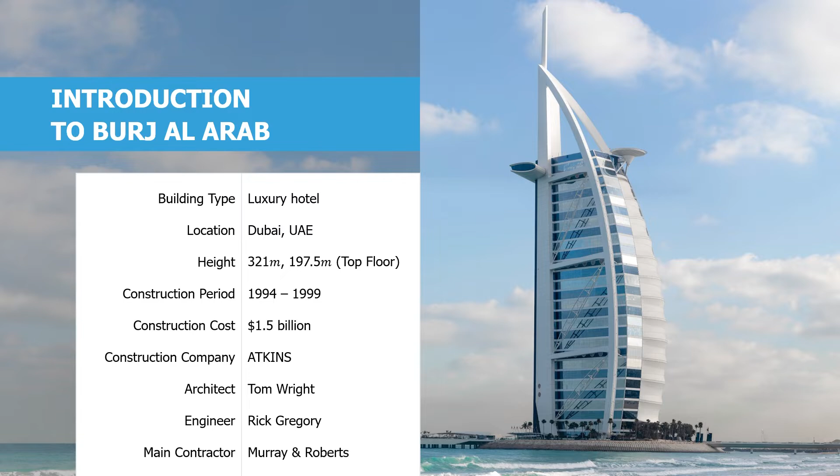Anthony Costa said Burj Al Arab takes hotel design to a new level of modern luxury and has also redefined the meaning of exceptional hospitality both in Dubai and around the world.

The project was split into 5 distinct parts with milestones assigned to each of the phases. However, the project monitoring and closure part, which includes interior legal elements and hotel sales, is not relevant to this class and therefore we don't explain it.

Dubai has achieved rapid economic development due to oil, but it was too risky to entrust Dubai's future to oil, a limited resource. So Dubai's ruler Mohammed bin Rashid Al Maktoum was looking for a new way to earn money. The alternative was a luxurious vacation spot, so the ruler needed a huge and luxurious symbol, like the best hotel in the world. It was planned to create a luxurious vacation spot to promote Dubai and make money from high-income earners.

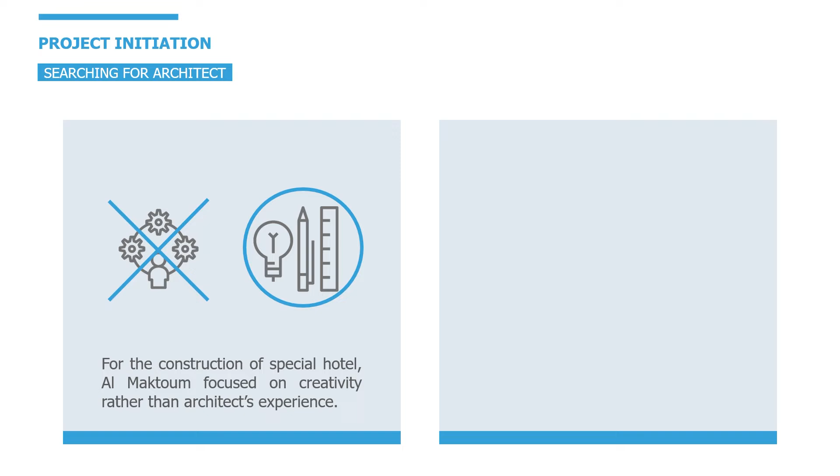For this special hotel, Dubai's ruler focused on creativity rather than the architect's experience. This is because a new and creative building was needed to promote Dubai. Tom Wright of Atkins was chosen as the architect for this huge project. Tom Wright was a 37-year-old young architect. He mainly designed unusual buildings but had no experience in high-rise buildings. His teammates were also young architects and engineers, and they also had no experience with tall buildings.

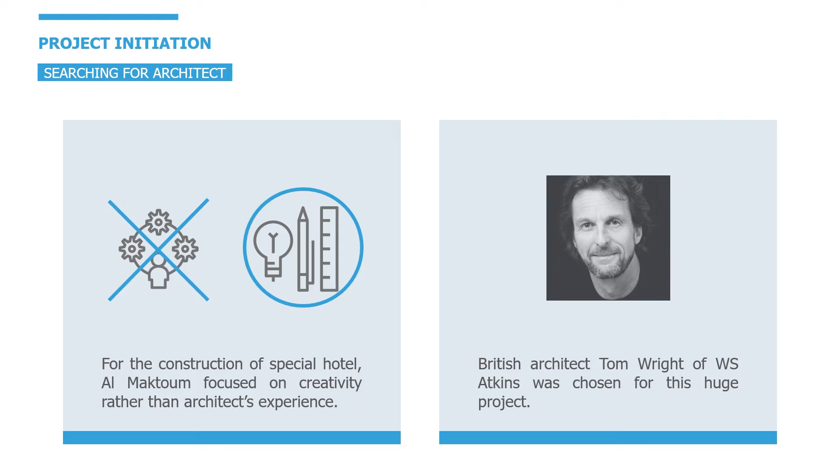However, the most important thing was the design of the hotel. This hotel had to be unique as it symbolized Dubai. So Atkins participated in the project as a design consultant, and Murray and Roberts participated as the main contractor for Burj Al Arab.

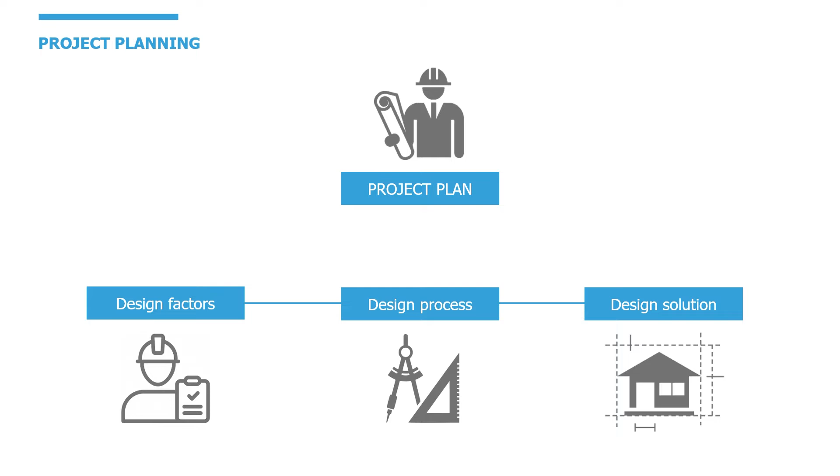Project planning consists of design factors, processes, and solutions. The architect tried to conceive a unique and concise form for a symbolic building. In other words, architects want to make people realize where they are, even if they had drawn only a few lines, like the pyramids and Sydney Opera House.

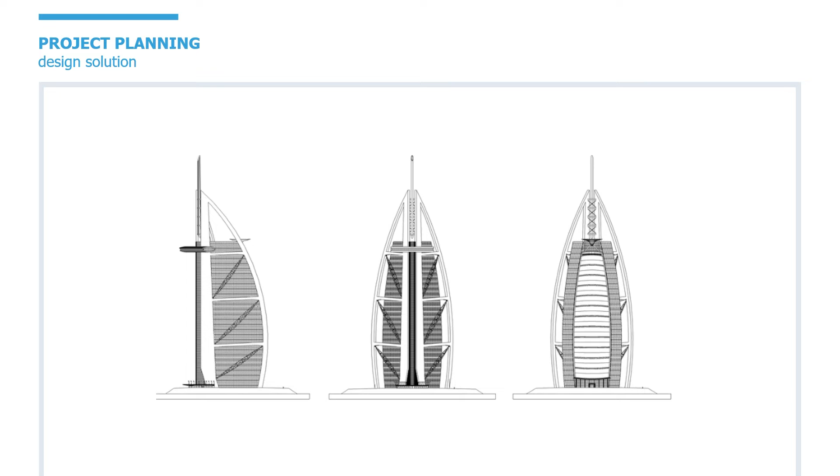The architect Tom Wright sat on the coast of Dubai, had a beer, and saw a yacht sail. Then suddenly inspiration came to think of the shape of the yacht. Simple in shape and made up of a few lines, all the elements of an iconic building were in place. The sail shape concept was of great importance to the people of the port city of Dubai, so it was enough to get the client's attention. So the architect completed this building.

Now, how the project was executed will start from the structure. To achieve the concept of a hotel on the sea, an artificial island had to be built. The architect actually wanted the building to look as if it were really floating, so the island's height had to be formed as low as possible. Also, the building had a special resemblance to Dubai's traditional ship, therefore it meant a lot to actually make it look like it was floating on the shore.

Inside the building, there is an enormous atrium, which is one of the biggest aspects of Burj Al Arab. The building's V-shaped span and the front of the building form an atrium with a height of 180 meters. This atrium is of a size where Dubai's World Trade Center, which was the tallest building in Dubai until the mid-90s, could fit in. The luxurious and extravagant east-west architectural style applied to the atrium adds exclusiveness to the hotel.

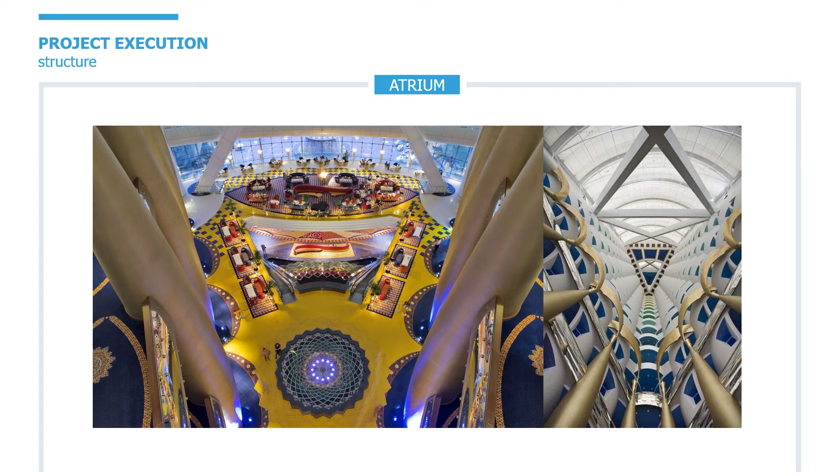Previously, we've told you that Burj Al Arab resembles the shape of Dubai's traditional ship. The V-shaped span, which is the core of the building, embodies an image of a mast, while the front of the building means the sail. The building interprets the ship's sail more intuitively, so they used fabric on the outer wall.

2 layers of Teflon-coated fiberglass fabric stretch over pre-tensioned arches and connect to girders on 2 floors. The material keeps the building away from the dust. The fabric, when seen from the outside, acts like a screen. The screen size accounts for half of a football stadium and hangs on top of the building with more than 52 kilometers of cable.

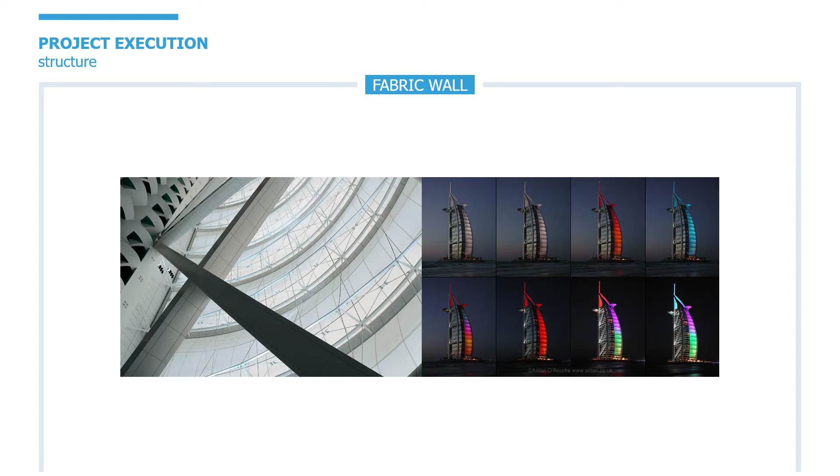Dubai's prime minister wanted his hotel to be the world's best, therefore he wanted the restaurant to be special also. Architect Tom Wright, as a result, made a restaurant where the customers could see the Arabian Gulf and Dubai at the same time and feel like they were floating in the clouds. This restaurant is 200 meters above the surface and 27 meters wide, centered on the axis of the building.

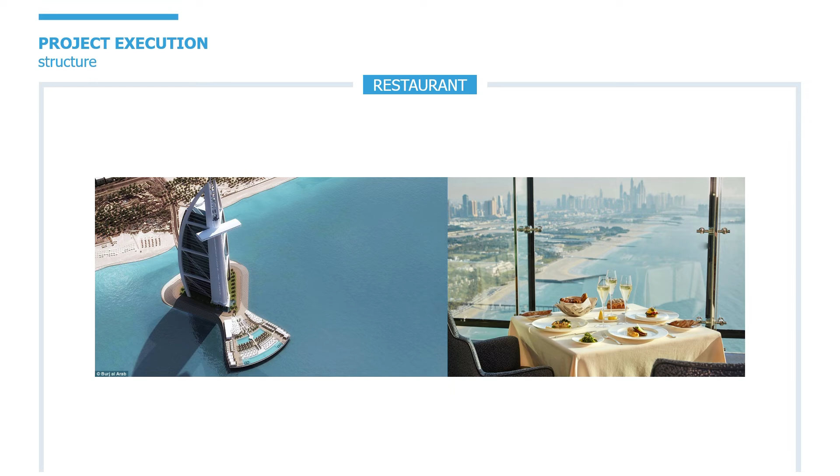Burj Al Arab has a unique roof also. If the customer is wealthy enough, he could ride his own helicopter, arrive at the roof, pass the vast space, and get into the building. The helipad is open to every single rich person in the whole world. Also, this helipad is famous for Tiger Woods teeing off and Andre Agassi and Roger Federer's tennis match.

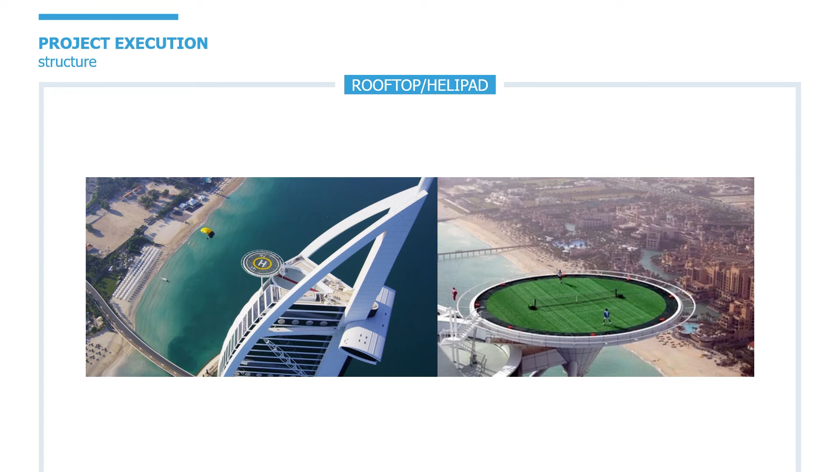However, because it takes up 39% of the 321-meter building, it is frequently criticized for preferring the luxurious style rather than the functional aspect of the building. We've mentioned a few characteristic structures found in Burj Al Arab, but to execute it, there were lots of construction engineering issues.

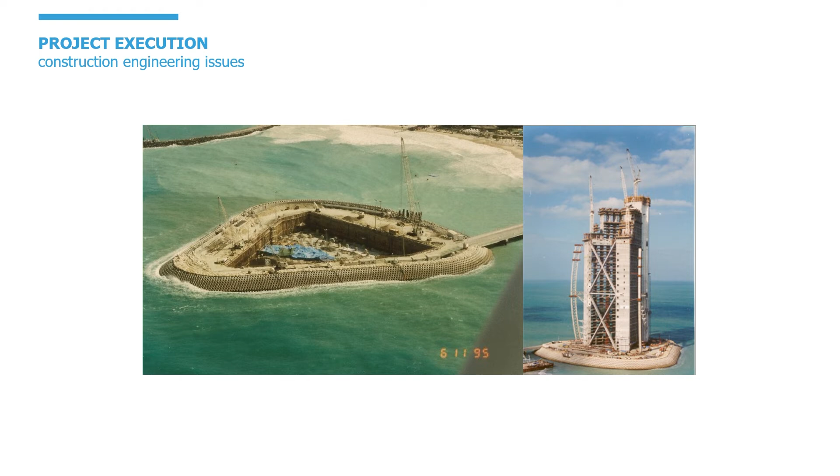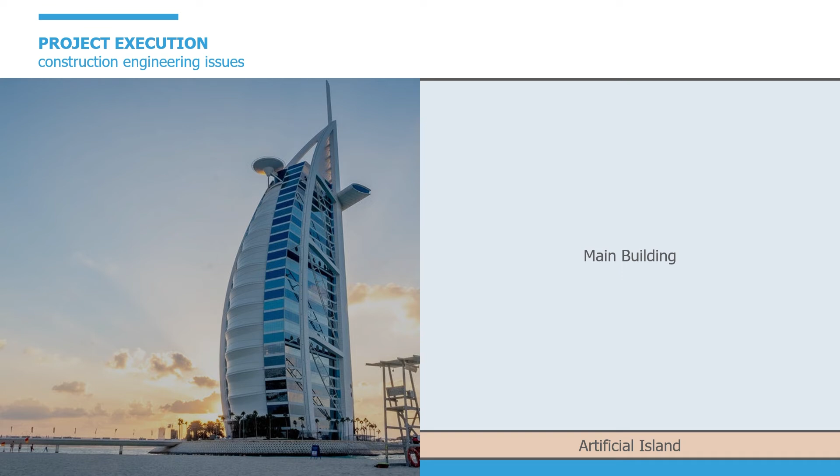To execute the concept of a hotel on a sea, an artificial island and the main building were necessary. Of the total 6-year construction period, they used nearly 3 years for the artificial island and the rest for the building. The ratio each of the two takes in the whole building is different, but its difficulty in construction and importance in structure is similar. There are 2 main factors that have raised the building's construction difficulty. First is the geographic problem, and the second is the structural difficulties.

The country Dubai, which is located at the shore of the Arabian Gulf, frequently had natural disasters, and its high temperature also affected the building in various ways. The building was for the wealthy class's luxurious vacation place, therefore normal and simple structure could not be applied. Consequently, structural difficulties arose.

To build the artificial island, waves were considered the utmost. As we mentioned before, for the building to represent a hotel above the sea, and for the users to be closer to the sea, Tom Wright had to design the island low, but Dubai's shore was open to high waves because of the frequent emergence of typhoons. Dubai was also located near a major fault line, so they had to be prepared in case of an earthquake.

The foundation was also the problem. They needed a solid foundation that could support the building with enormously heavy weight, and it was supposed to be on the sea. But they couldn't find a solid rock foundation anywhere on Dubai's shore. They needed another way to support the building.

The fact that the building was on the sea wasn't the only geographic problem to consider. The wind, which is a classic problem for every skyscraper, was also a problem, and the hot weather of Dubai not only affected the building but also the workers. The structural difficulties were because of unusual structures for the special building the Prime Minister wanted. It could be the V-shaped core, the Skyview restaurant, and more. These structures not only gave limitations to construction, but also affected the construction period.

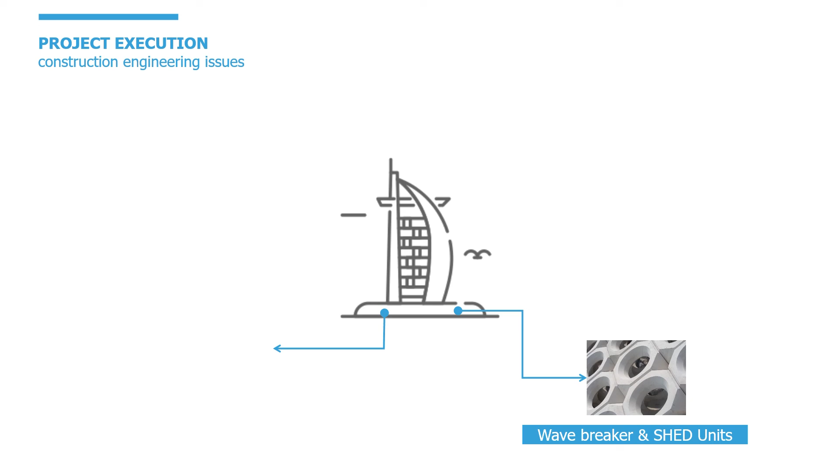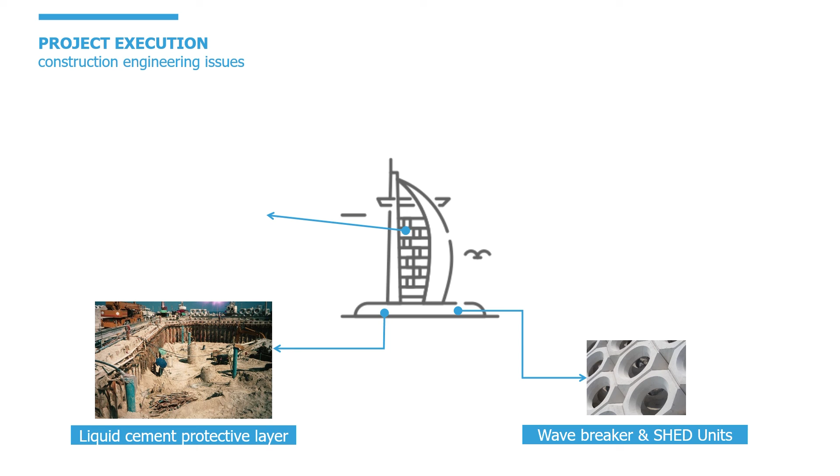So, how did they handle the geographic problems? They developed a special seawall that could break down the waves. The insecure foundation and the possibility of earthquake, they solved with compacting, a protective layer made of liquid cement, and friction. Wind was handled by a damper, and for the Skyview restaurant, which is almost the size of a normal building, they cast steel brackets into the core.

The climbing jump form system played a huge role in shortening the construction period. Other than that, rear brace frame and air conditioning systems were used for construction. Our team will be studying more deeply each of these construction methods in our henceforth presentations.

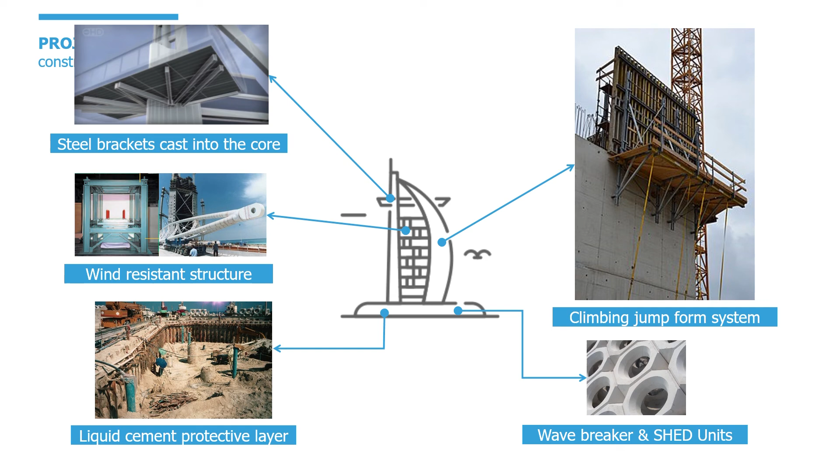We've organized our plans for the study for a total of 10 weeks. For the following 2 weeks, we'll be studying the detail of structure and site environment analysis and project management respectively. And the rest of the weeks, we'll concentrate fully on studying construction starting from foundation, steel exoskeleton, and other factors we'll learn during our studies.

Finally, about our team members' roles. Every single member of this project will basically be doing research together. For this week's presentation, Oh Jeonghoon and I did the presentation, Gong Taewon did the PPT design, Seongho made the outline of the PPT, and Munkhjin organized the data. We'll be allocating equal amounts of roles to each team member and change the roles flexibly every week.